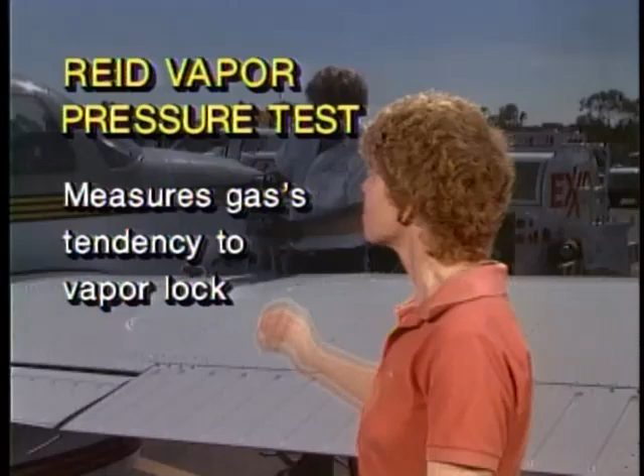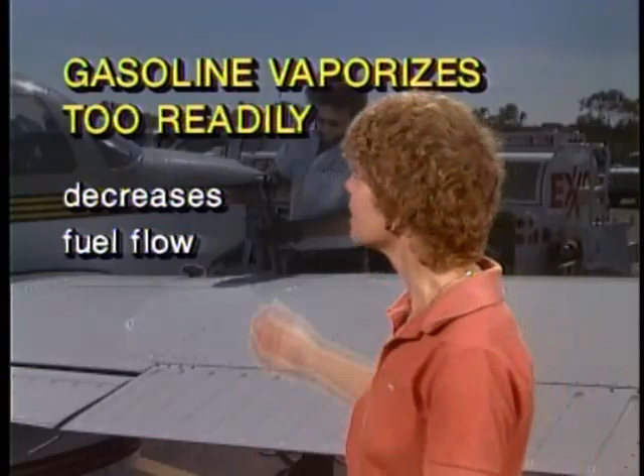The measure of a gasoline's tendency to vapor lock is obtained using the Reid vapor pressure test, which measures a gas's tendency to vapor lock. If aviation gasoline vaporizes too readily, the fuel lines will be filled with vapor, and that decreases fuel flow. It does not increase fuel flow, it decreases fuel flow because you've got vapor in the fuel lines.

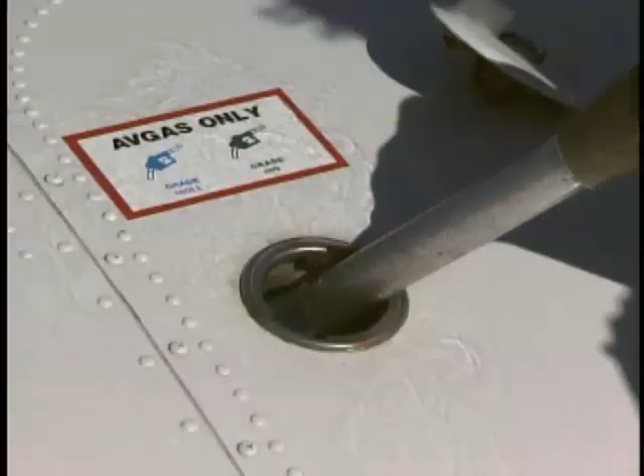The maximum vapor pressure allowable for aircraft fuel is 7 psi, and the allowable vapor pressure of aviation gasoline is lower than that of automotive gasoline. You have to be more careful about the vaporization characteristics of aviation gasoline because it goes up to high altitudes, so the allowable vapor pressure is lower than for automobiles.

Some aviation fuels are aromatic fuels, particularly the high-octane fuels, but a disadvantage of using aromatic aviation fuel is that it deteriorates rubber parts. So you have to keep a much closer watch on those kinds of parts in the aircraft, and in a lot of cases, synthetic rubber parts will have to be used.

One of the things about fuel is that temperature affects the weight of the fuel. Cold fuel is heavier per gallon than warm fuel. And since the aircraft engine is really getting its energy by the weight of the fuel, when you have cold fuel, you're actually going to have more energy available for the aircraft engine as far as the volume is concerned.

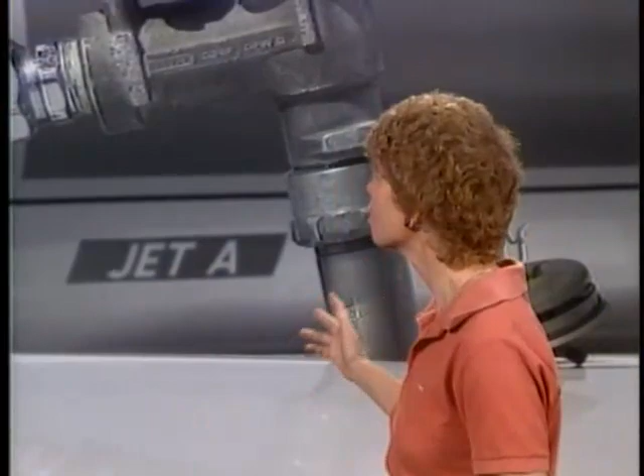As far as jet fuels are concerned, jet fuels are more susceptible to water contamination than aviation gasoline is. The reason is because jet fuel, turbine fuel, is more viscous than gasoline — it's thicker — and therefore it tends to hold that water in suspension.

Using turbine fuels in aircraft has resulted in problems you don't associate with aviation gasolines. One of these problems is microbial contaminants — basically organic material growing in the turbine fuel, produced by various forms of microorganisms. They live and multiply in the water that is suspended in the jet fuel, what the FAA calls the water interfaces of the jet fuels.

If you've got microbial growth in a jet fuel tank and it's not corrected, all those microbes and that growth will interfere with the fuel flow and the fuel quantity indicators. That growth can also cause electrolytic corrosive action in the metal tanks if you don't stop it.

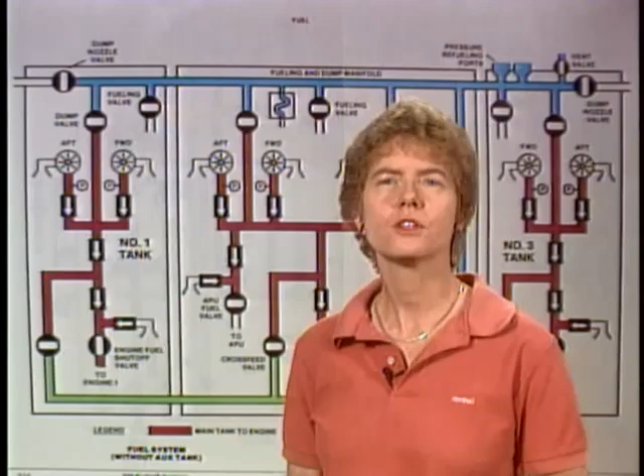Now let's talk about fuel system design. If you've got large aircraft like a 727, you're going to have all kinds of lines running around between the tanks and between the engines, with multiple manifolds in there. The whole purpose of that fuel manifold system is to let you move fuel wherever you want to.

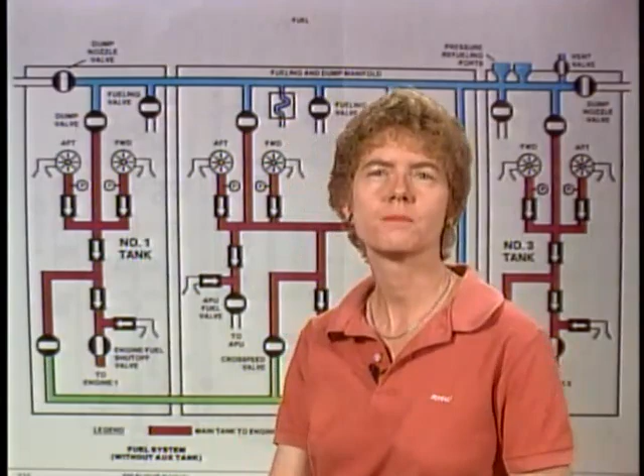What the fuel manifold system allows is, first of all, the tanks can be serviced through a single connection — you can do pressure fueling with all the tanks serviced through one connection. In addition, any engine can be fed from any tank in the airplane, and that gives you redundancy, which has a lot of value in case you've got a problem with any one tank.

All engines can be fed from all the tanks simultaneously — it just depends on how you set up the valves in the system, which gives you lots and lots of options. In addition, a damaged tank can be isolated from the rest of the fuel system.

If for some reason you get a leak in the tank, a lightning strike, or any kind of damage, you can isolate it from the rest of the fuel system, and that's what a fuel manifold system allows you to do.

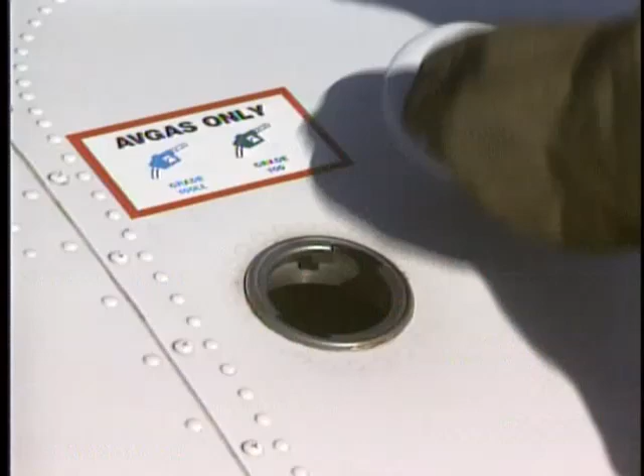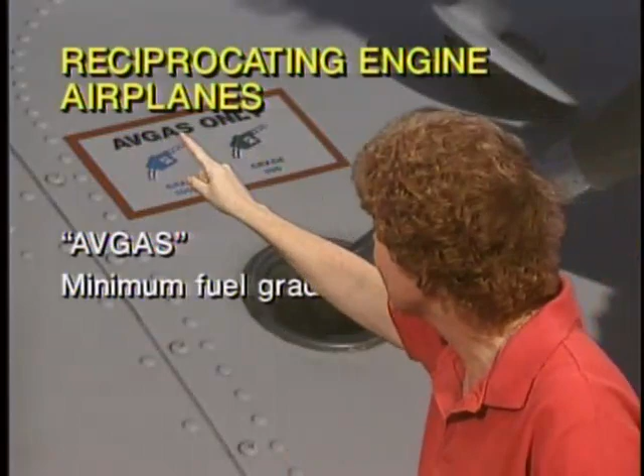When it comes to fueling an airplane, in an effort to avoid people putting the wrong fuel into airplanes and causing accidents, there are minimum required markings that have to be placed on or near the fuel filler cover. For reciprocating engine-powered airplanes, those are the word avgas, so you don't accidentally put jet fuel in it, and also the minimum fuel grade required, for instance 100 octane or 100 low lead.

If it was a turbine-powered airplane instead, instead of avgas it would say jet fuel. The whole idea behind these required markings is to make sure the airplane does not get misfueled.

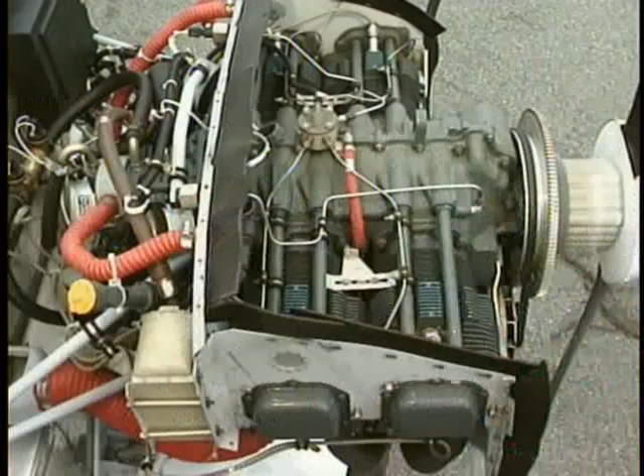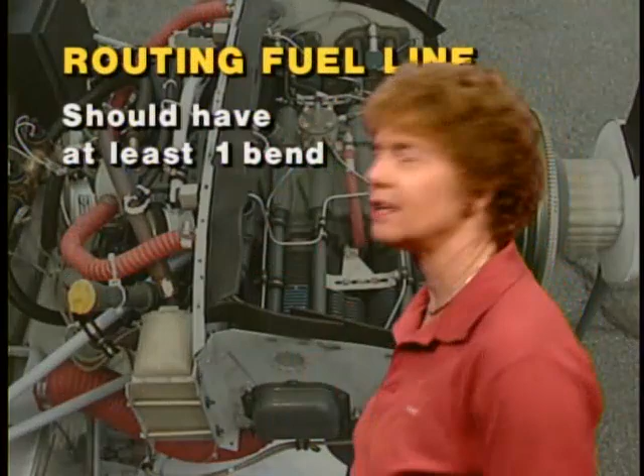Now let's assume you're routing a fuel line like this one here between two rigidly mounted fittings. The way you want to do that is to have at least one bend between the fittings, for strain relief that helps prevent the line from cracking. You do not have to use flexible hose, but you do want to make sure you've got at least one bend in it to help relieve the strain.

Fuel system components must be bonded and grounded, and the idea behind that is to drain off static charges to prevent sparks and thereby prevent fires and possibly explosions.

The main fuel strainer will be located at the lowest point in the fuel system, usually on the bottom of the cowling, one side or another in the engine compartment area. The purpose of it is to trap any small amount of water that may be present in the fuel system. That is the main strainer down at the lowest point in the fuel system.

A lot of aircraft have a gravity feed fuel system that can supply fuel to the engine from more than one tank at a time, like this 172. In that case, the air spaces between the tanks have to be interconnected in order to vent those tanks properly. Let's talk about those fuel tank vents.

One purpose of the fuel tank vent is to limit the pressure differential between the tank and the atmospheric pressure. What the vents are trying to do is maintain atmospheric pressure within the tank, so that the fuel will flow down to the engine properly in that feed system.

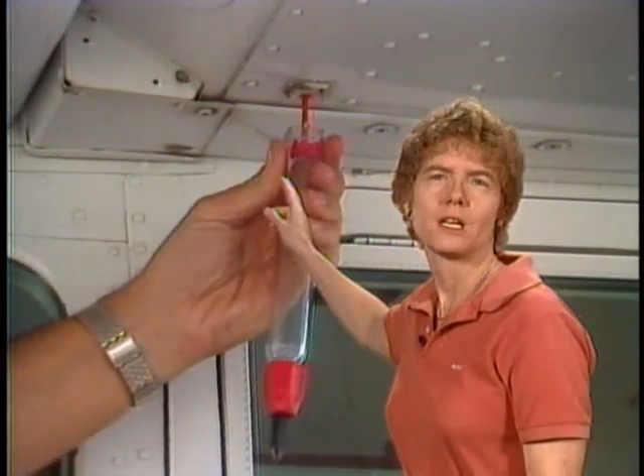On the bottom of the tanks you're going to have a fuel tank sump. The primary purpose of that fuel tank sump is to give a place where water and dirt accumulations, whatever's accumulated in the tank, can be collected and drained out, giving you a chance to check for contamination in the tank.

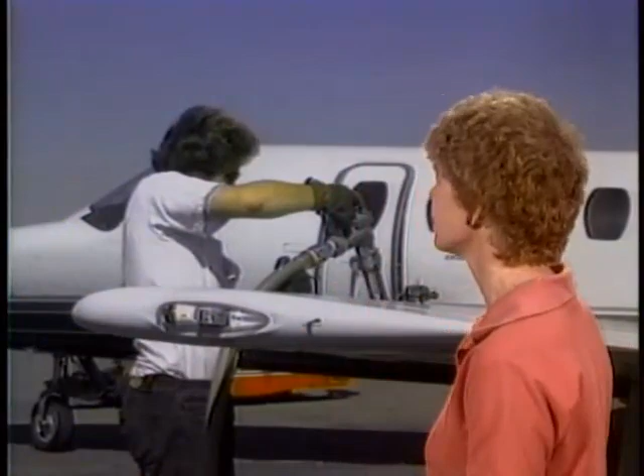There's a number of different ways that fuel tanks can be placed in an aircraft. One way is what's called an integral fuel tank. A Citation, for instance, and a lot of other planes have an integral fuel tank, and a more common name for it is a wet wing.

The integral fuel tanks, or wet wing, are formed by the aircraft structure itself. There's no other tank, no bladder or anything - it's simply formed by the aircraft structure. The reason integral fuel tanks are used in a lot of aircraft, particularly larger aircraft, is to reduce the weight. It gives you a lot less weight if you can use the structure of the wing itself to create the fuel tank.

In the fuel tanks, you're going to have flapper valves used as check valves to keep the fuel from going back away from where you want it to be, for instance around the boost pumps. Flapper type check valves are used in integral fuel tanks to prevent the fuel from flowing away from the boost pumps. As the fuel accumulates around the boost pumps, those flapper type check valves keep the fuel there, preventing it from flowing away.

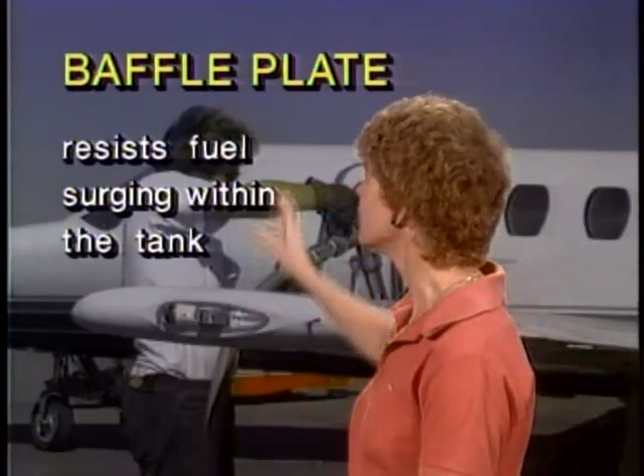Fuel tanks will also have baffle plates in them, and the purpose of a baffle plate in a fuel tank is to resist the fuel surging back and forth within the tank. It slows the fuel down and keeps it from sloshing and surging around.

Some aircraft, for instance the Cessna 182, have bladder type fuel tanks. The bladder type fuel tank is just what its name says - a bladder that goes inside the aircraft wing, and that's what holds the fuel.

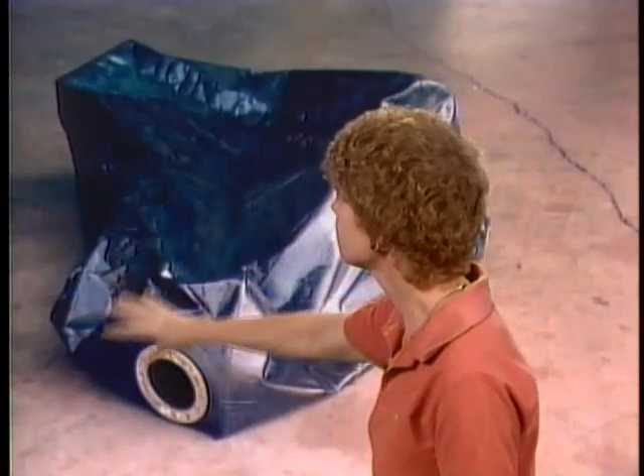If the airplane is going to be left empty for an extended period of time, not flown for a long while, then the inside of that bladder tank needs to be coated with a film of engine oil. The reason for that is to make sure the bladder tank does not deteriorate.

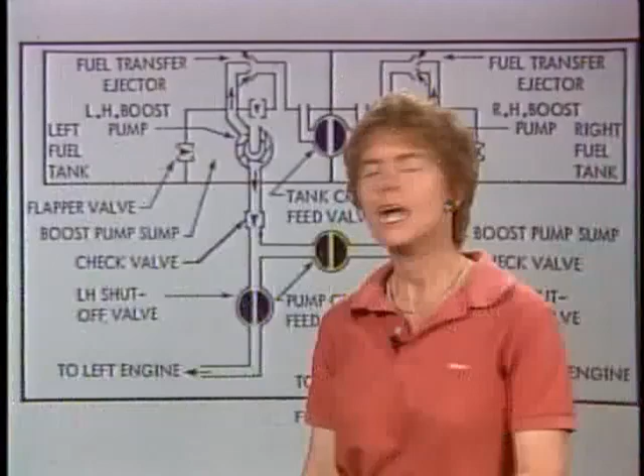If you have a multi-engine aircraft, you're going to have a fuel cross-feed system. Take a look in the FAA's Appendix 2 at Figure 17, which shows the fuel cross-feed system on a twin-engine aircraft. The primary purpose of a cross-feed system is to allow you to feed any engine from any tank, giving you a lot of flexibility.

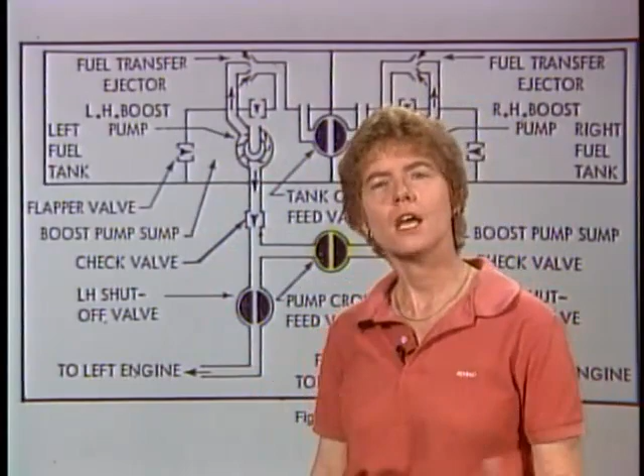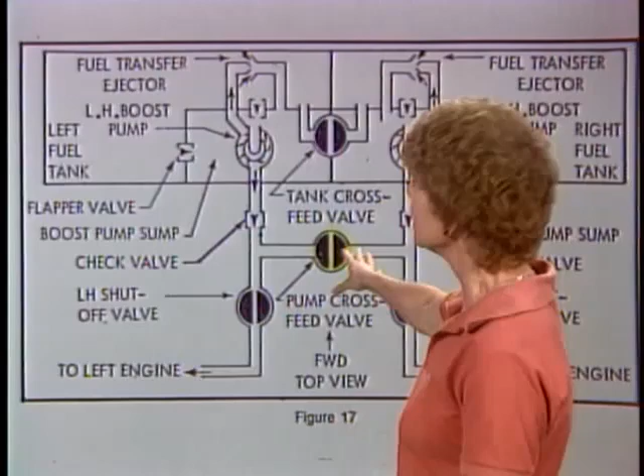There are various valves in this cross-feed system, and they're going to ask you the purpose of the pump cross-feed valve. There is a tank cross-feed valve, and down in the center of Figure 17 there's a pump cross-feed valve. The purpose of the pump cross-feed valve is to allow operation of both engines from one tank. It is not to allow you to pump fuel from one tank to another - that's what the tank cross-feed valve does.

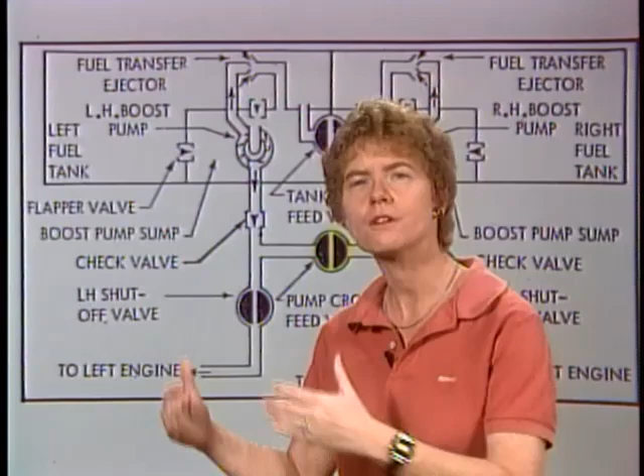Cross-feed systems are used in multi-engine aircraft primarily to maintain a balanced fuel condition. If you've got more fuel in one tank than another, you can feed both engines out of one tank, balance the load, and then go back to feeding each engine off of its normal tank.

Let's talk about fixing fuel tanks. Sometimes you need to repair a fuel tank. If you're going to repair a fuel tank, you need to empty the fuel out first, and you want to avoid conducting any defueling and tank purging operations in any enclosed space - not in an air-conditioned building or any enclosed space. You want to be out in the open air in a well-ventilated area.

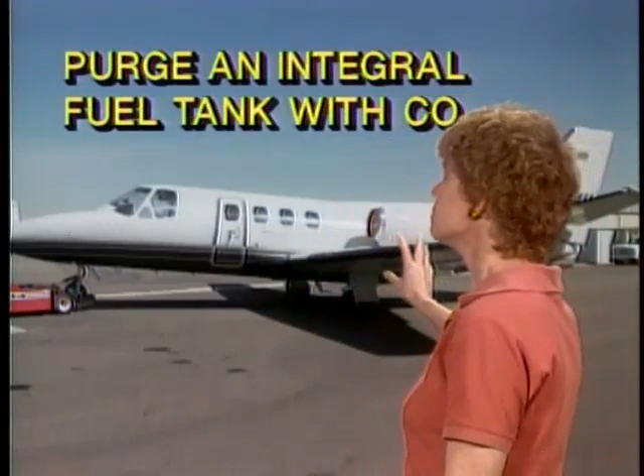An integral fuel tank, one that's basically the wet wing, you should purge with carbon dioxide, CO2, before you try and do any repairs on it. You want to make sure the fuel vapors are out of the tank before you start doing any repairs.

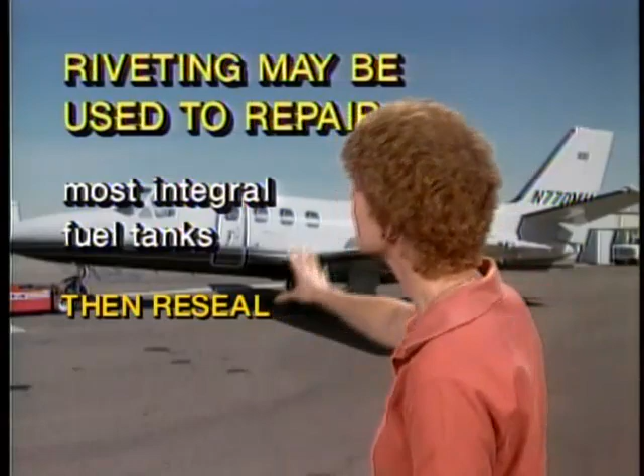When you're repairing integral fuel tanks, riveting can usually be used to repair those tanks because they are part of the basic aircraft structure, so you can use riveting as you would on the aircraft structure to repair those integral fuel tanks.

Some aircraft, such as an older 172, actually have metal tanks in the wings for their fuel tanks - not rubber bladders and not wet wings, but actual metal tanks. If those need work, for instance welding, you want to take the tank out, but before you do any welding, make sure you steam clean it very thoroughly. That way you'll get rid of any fuel or fuel vapors that might cause a fire or explosion problem.

When you're done, if you want to inspect that removable rigid fuel tank for leaks, the best way is to pressurize the tank with air and then brush it with soapy water and look for bubbles. If you see bubbles, it means air is coming through into that soapy water and you've got leaks. It's not practical to submerge the tank in water or fill it with water to look for streams or dribbles. The easiest way is to pressurize it with air and check the soapy water for bubbles indicating leaks.

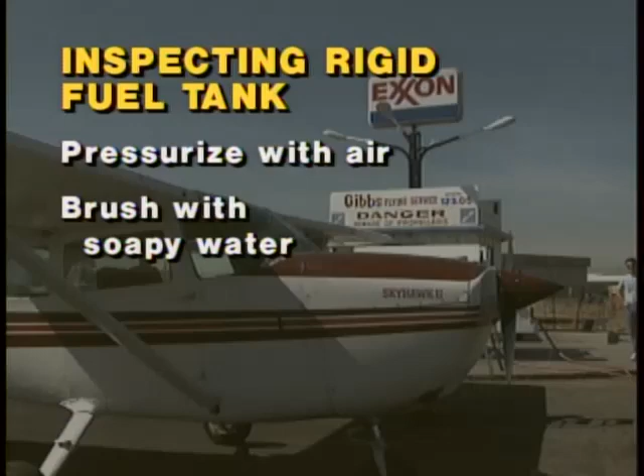Now let's talk about fuel pumps, first of all boost pumps. The fuel boost pumps in an aircraft are operated to provide a positive flow of fuel to the engine. They prevent bubbles in the fuel after it leaves the tank if atmospheric pressure is lower than the fuel vapor pressure, and that fuel pump basically helps make sure the engine keeps running.

Some boost pumps are a centrifugal type boost pump that is buried or sunk in the fuel tank itself. Centrifugal type boost pumps are used in fuel systems, particularly of aircraft operating at high altitude. They supply fuel under pressure to the engine-driven pumps and prevent vapor lock. The centrifugal type pump separates air and vapor from the fuel before it enters the line to the carburetor.

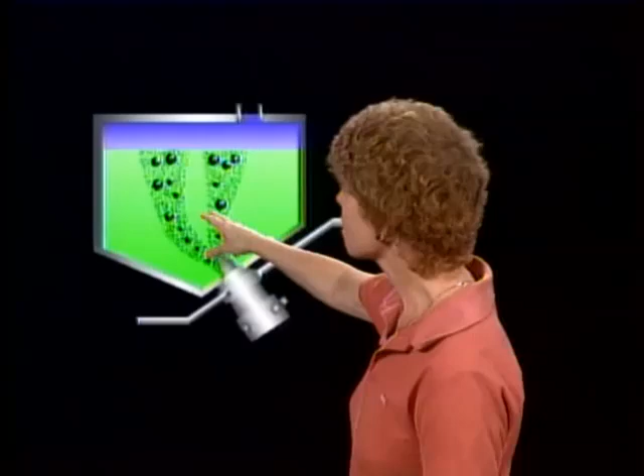How much fuel pressure you've got on the outlet side of a centrifugal type fuel pump is regulated by the pump's design and its own internal clearances. It is not regulated by the speed of the engine, because when you're working with a submerged single-speed centrifugal type fuel pump like this, it's the pump's design and internal clearances that control the outlet fuel pressure.

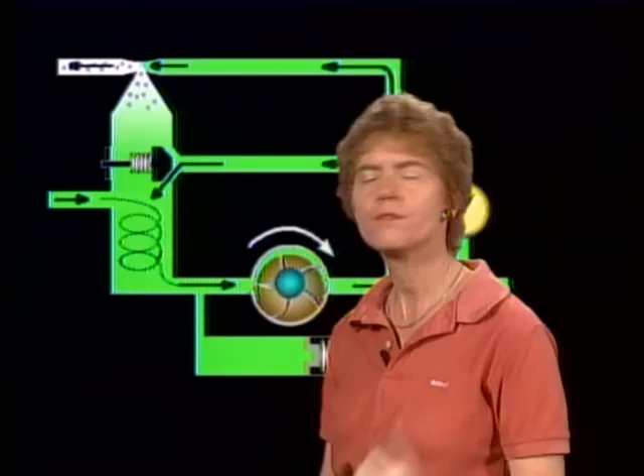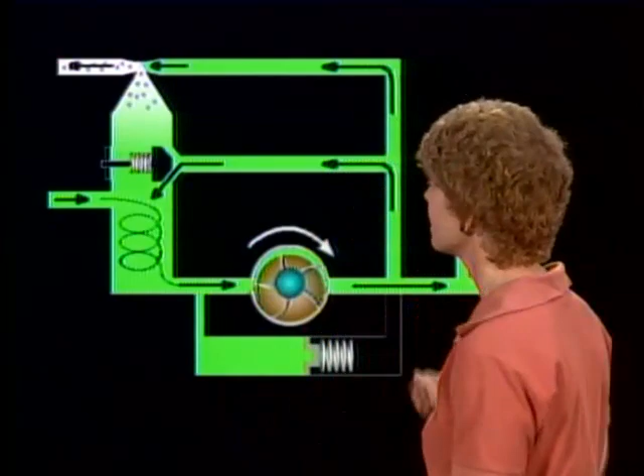A centrifugal type pump like this is not a positive displacement pump. The primary fuel pump on the engine tends to be a positive displacement fuel pump, and a positive displacement fuel pump has to have a fuel pressure relief valve. It's required by FAA regulations because it's always putting out the same amount of fuel through the pump, and the engine isn't always able or ready to accept that much fuel pressure.

So the FAA will ask you on the test: does a centrifugal fuel pump have to have a fuel pressure relief valve? Well, is a centrifugal fuel pump a positive displacement pump? No, it's not, and therefore it does not have to have a fuel pressure relief valve.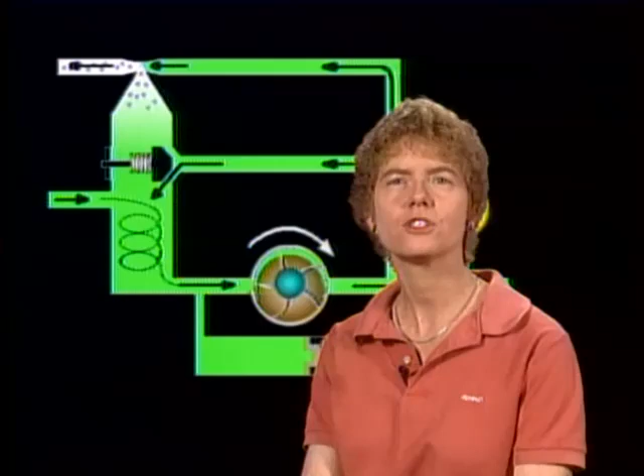On the other hand, they'll ask: do you need a fuel pressure relief valve on a sliding vane type fuel booster pump? A sliding vane pump is a positive displacement pump, and if it's a positive displacement pump, does it have to have a pressure relief valve? Yes, it does. So a pressure relief valve is required in a sliding vane fuel booster pump.

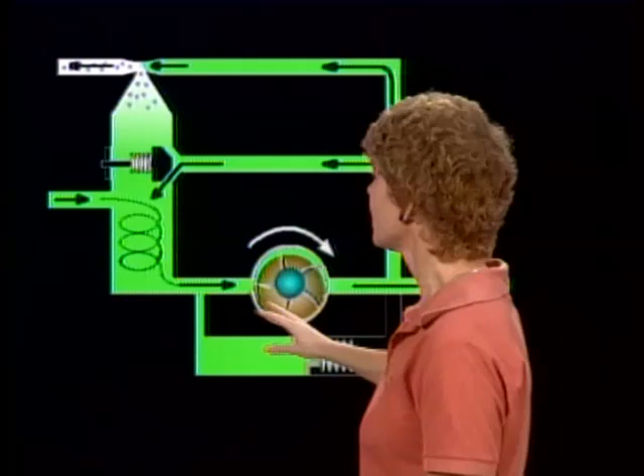Now, a vane type pump like this will also have a diaphragm in it, and the purpose of the diaphragm is to compensate fuel pressures for altitude changes, so that as the aircraft changes altitude, you don't get changes in the fuel pressures.

Let's talk now about our fuel quantity indicators, which figure out how much fuel there is in the aircraft. There are 4 basic types of fuel quantity gauges: electronic types, electrical gauges, mechanical gauges, and sight glasses. Sight glass is pretty obvious - there's just a glass coming up. The old Yankees had it, and a lot of other aircraft, where you can actually see how much fuel there is up through the sight glass.

Mechanical ones, you see for instance in the old Pacers where you've got basically a cork and a little metal wire sticking up out of it, and depending on how much fuel you've got in the tank, the cork and the wire bob up and down. Electronic and electrical we're going to talk about in more detail in just a minute.

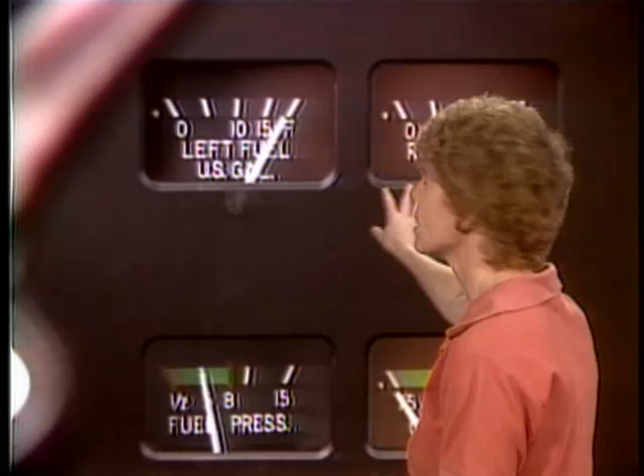As far as the calibration on these fuel quantity gauges are concerned, they have to be calibrated to read 0 in level flight if the quantity of fuel remaining in the tanks is equal to the unusable fuel supply. In other words, when you've used up all your usable fuel, the gauges should read 0. You don't want the gauges reading 5 gallons if that fuel is not usable to the aircraft. So when you get down to the unusable fuel supply, those gauges should read 0, calibrated that way in level flight.

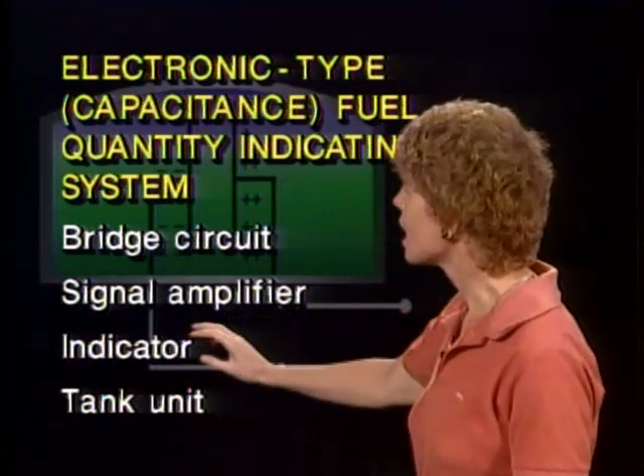Let's talk now about the electronic type, or capacitance type, fuel quantity indicating system. There are 4 basic elements on that capacitance type fuel quantity system: a bridge circuit, a signal amplifier, an indicator in the cockpit, and a transmitter unit - a tank unit that is sending the signal. Let's take a look at this unit and see what we've got there.

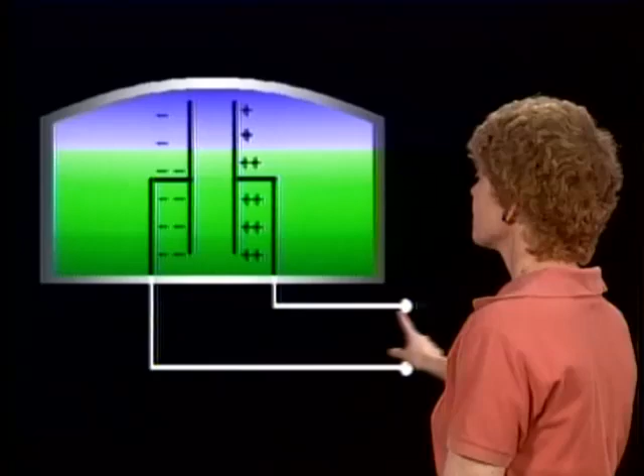In the tank, there are no moving parts as far as a capacitance type or electronic fuel quantity system is concerned. What you've got is a probe, or maybe several probes, installed in the fuel tank. This is the probe here, and here are the electrical wires coming out of it. We have fuel in most of the tank, but then we have air up above it. The probe, or tank transmitter, is basically an electric capacitor, with fuel and air located above the fuel, which act as a dielectric.

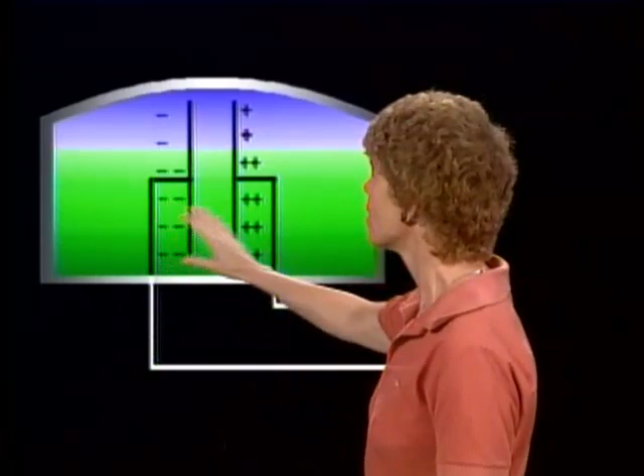A dielectric means a non-conducting material. So basically what you've got is charges trying to move from one side of the electric condenser, which is the probe, to the other. But you have the fuel and the air, which are the dielectric, the non-conducting material, between the 2 parts of the probe or condenser. What happens is that the non-conductivity of the fuel and the air is different.

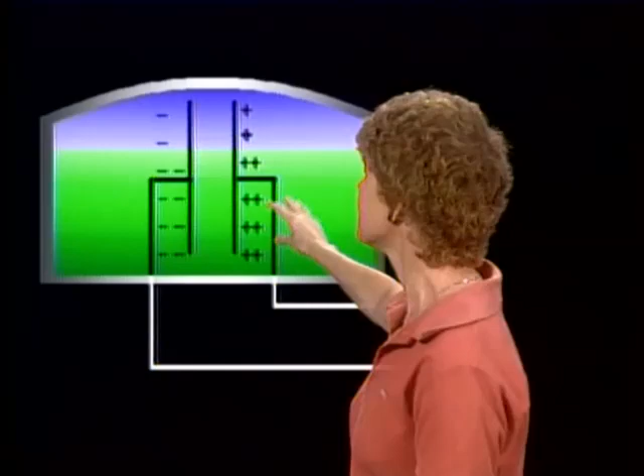So how much electricity can move from one side to the other depends on what the ratio is between the fuel and the air in that tank. The capacitance type gauges tend to be very accurate because they do not have any moving parts in them.

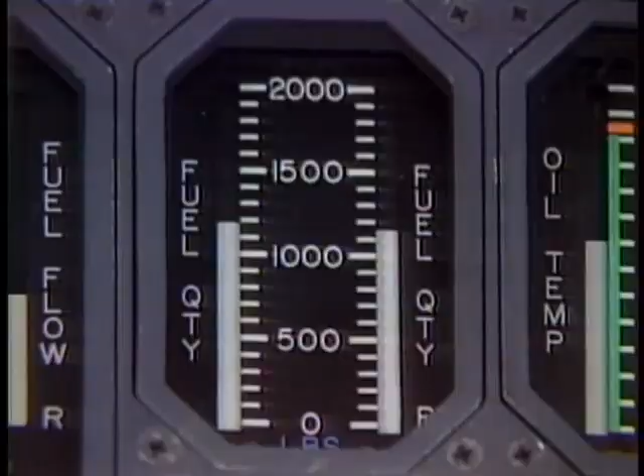They're very accurate in measuring fuel level because they measure by weight, by pounds rather than by gallons. Measuring by pounds instead of gallons is more accurate because the volume of fuel varies with temperature change. You've always got the same number of pounds, but the gallons of fuel will change depending on the temperature of the fuel.

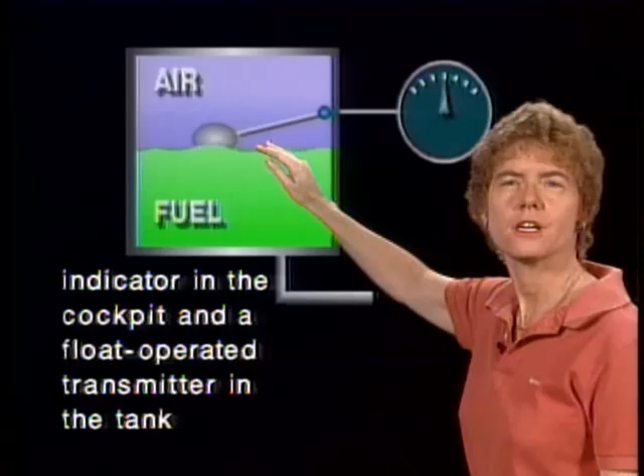Another type of fuel quantity system is the electrical type, which has an indicator in the cockpit and a float-operated transmitter in the tank. The purpose of that float-operated transmitter is to send an electric signal to the fuel quantity indicator. It is not a mechanical connection. It's an electrical signal going from the transmitter in the tank, activated by the float, sending the signal to the indicator in the cockpit.

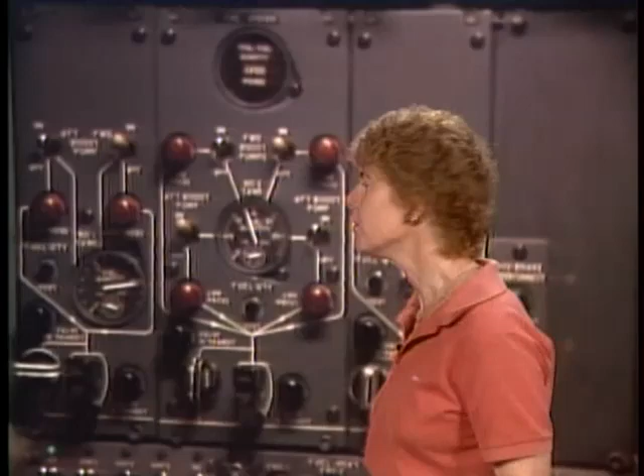Some aircraft have a fuel totalizer. The 727 is one of those, and the fuel totalizer indicates the amount of fuel in all the different fuel tanks—in this case, three different tanks—telling you how much you've got in all the tanks together. That is one definite advantage of electrical or electronic fuel quantity indicating systems.

Several fuel tank levels can be read on one indicator, and the indicator can be located any distance from the tank. You don't have to worry about a mechanical or visual connection, so you can put the indicator any distance from the tank that you want.

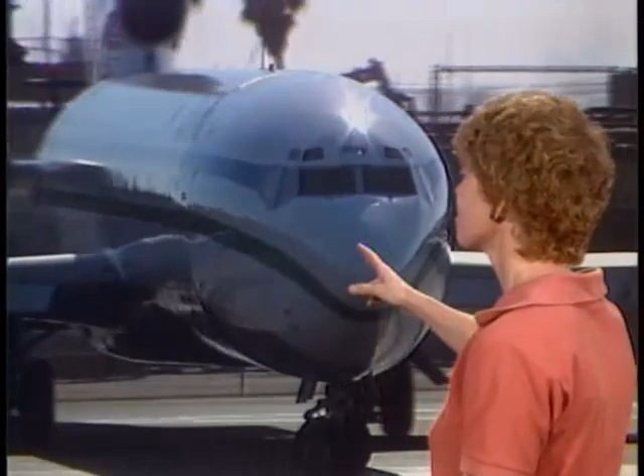On large transport category aircraft, another way to measure the amount of fuel in the tank is to use a drip stick. Unlike what its name sounds, a drip stick is not something you use to check if something's leaking, like fuel or oil. It's basically a visual way of measuring the amount of fuel in the tank using a stick in the wing, filling it with fuel and seeing exactly when it starts dripping out the end.

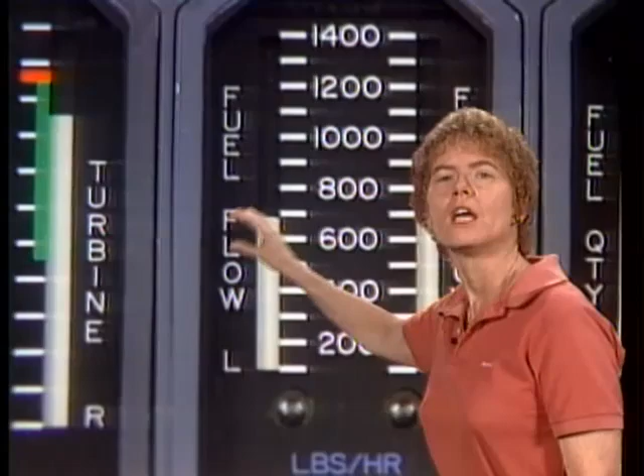Now, how do you tell how much fuel you're using? One way is with fuel flow indicators. Fuel flow transmitters in the fuel lines are designed to transmit data electrically, so you get an indication of how much fuel flow is actually going through the engines.

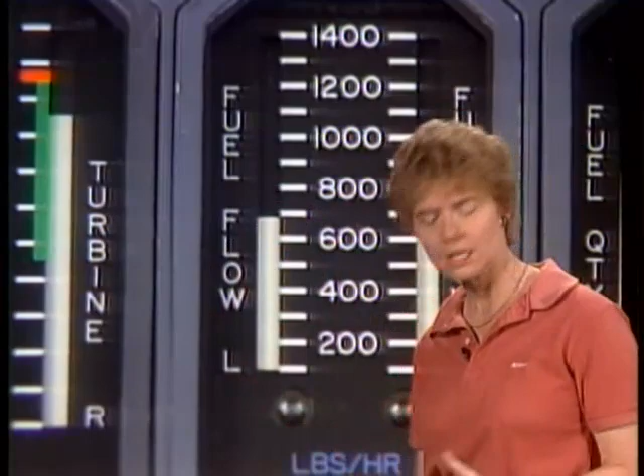Some aircraft, instead of having fuel flow indicators, have fuel pressure indicators. A fuel pressure gauge, like you have in, say, an Archer, is a differential pressure indicator, using fuel pressure and ambient atmosphere to get a differential pressure indication. The fuel pressure gauge indicates the pressure of the fuel as it's entering the carburetor.

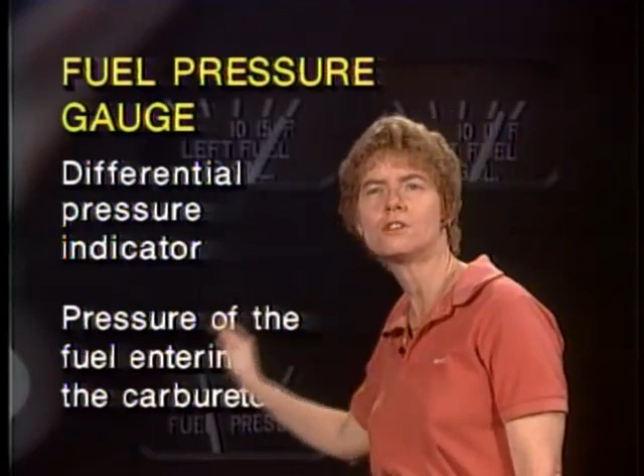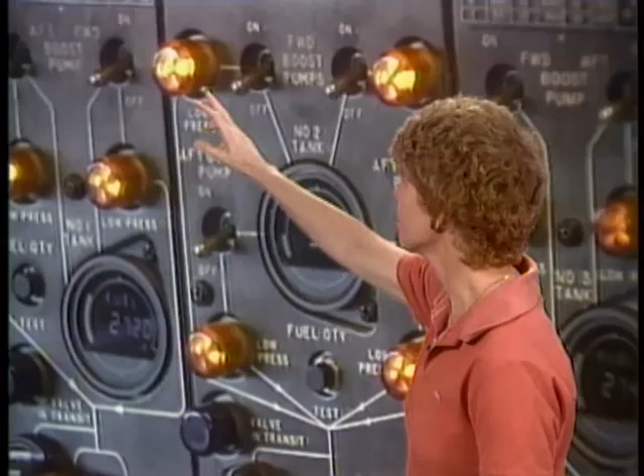Large aircraft, particularly multi-engine aircraft, will very often have a fuel pressure warning system, like these amber lights on the 727. When they illuminate, you've got low fuel pressure. A fuel pressure warning signal system prevents you from allowing the fuel supply in one tank to run out before you switch the selector valve to another tank, because when the pressure gets low, that light illuminates and tells you that you're running out of fuel.

The fuel pressure warning gives you the first positive indication that you need a changeover from one fuel tank to another, because it tells you you're losing fuel pressure due to not having enough fuel coming in the lines. It uses a pressure-sensitive mechanism that actuates the fuel pressure warning system, and that mechanism can be adjusted to change where the fuel pressure warning lights come on, changing the warning limits.

The transmitter in the fuel pressure warning system takes fluid pressure in the lines, however much fuel pressure there is, and converts that to an electrical signal. When the fuel pressure drops below the limits you've set the mechanism for, the fuel pressure warning switch contacts close and the warning light comes on.

Now, if you're dealing with a reciprocating engine aircraft as opposed to a turbine engine aircraft like we have here, the fuel pressure line at the carburetor is where the pressure is taken for the fuel pressure warning signal.

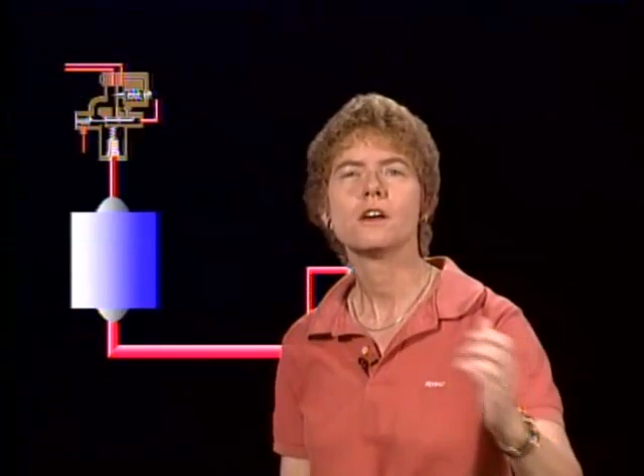Fuel system icing is another problem that gas turbine engines have, and the fuel systems in turbine engines are very susceptible to forming ice in the fuel filters.

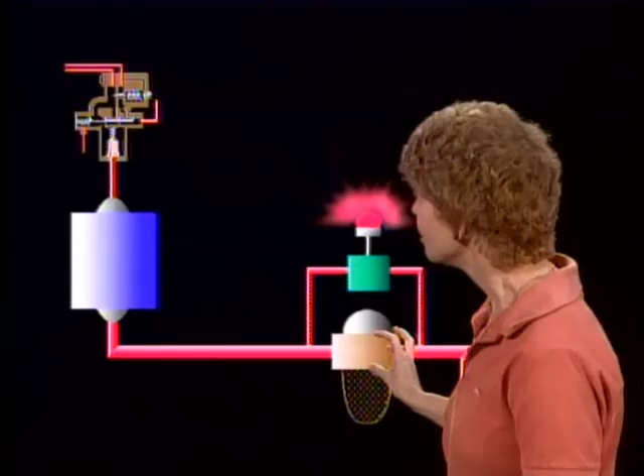You want to prevent the ice from forming in the fuel filters, and a very common way of doing that is to add anti-icing fuel additives. You can heat the fuel, which we'll talk about in a minute, but another way to take care of the problem is to add anti-icing fuel additives.

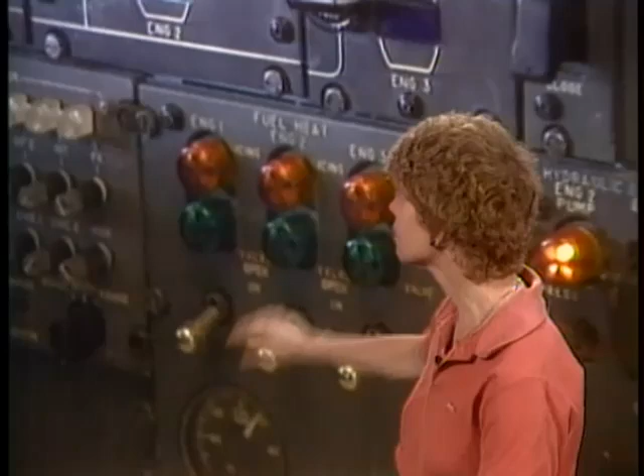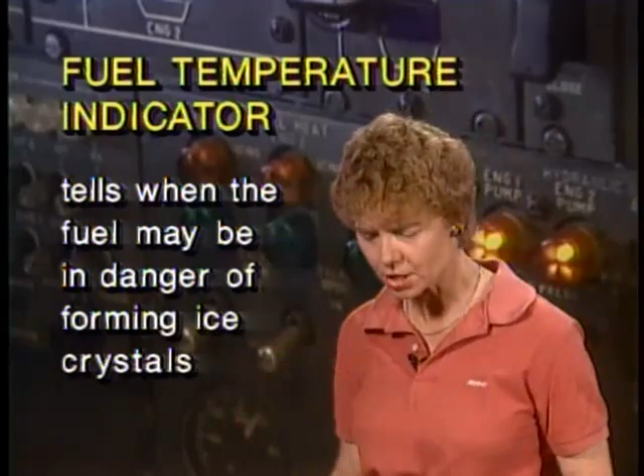Now, on some aircraft, what they do is heat the fuel. For instance, on the 727, you've got a fuel temperature indicator, and a gauge right down here below the fuel heat panel. The fuel temperature indicator tells you when the fuel may be in danger of forming ice crystals because it tells you what the temperature of the fuel in the tanks actually is. Okay, that's nice. You know the temperature of the fuel in the tanks. What do you do about it?

Well, you've got a fuel heat system. What the fuel heater does is it protects the fuel system from ice formation because it operates as a heat exchanger. It takes hot bleed air off the engine and runs it through a heat exchanger past the fuel, which warms up the fuel and prevents the ice from forming.

The aircraft fuel heater can be used, by the way, to thaw ice in the fuel screen. If you actually have already gotten ice in the fuel screen, you can use that fuel heater to go ahead and thaw the ice.

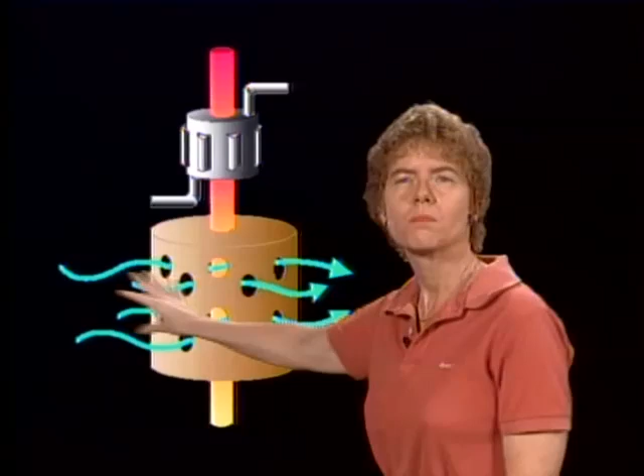Now, one way to heat the fuel is to use engine bleed air. But another way to do it is to use the engine lubricating oil as a source of heat. Some aircraft have one or the other, some aircraft have both. So either engine bleed air or engine lubricating oil can be used as a source of heat for the fuel in order to keep ice crystals from forming in the fuel.

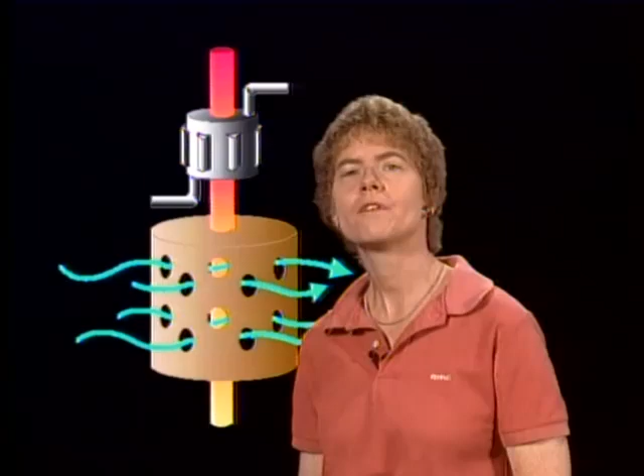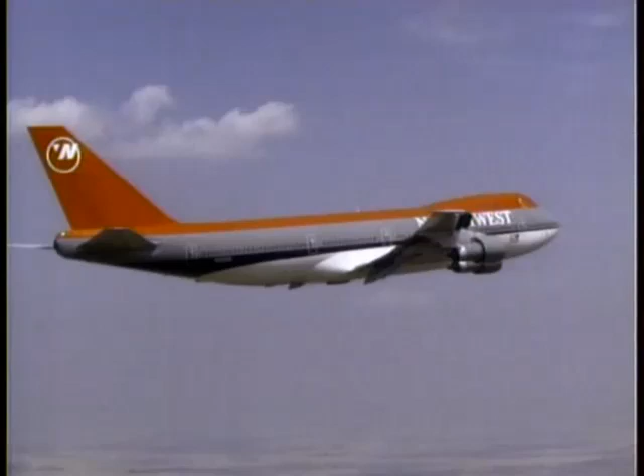Both transport category aircraft, like this airliner, and general aviation aircraft require a fuel jettison system under certain conditions if the maximum takeoff weight exceeds the maximum landing weight.

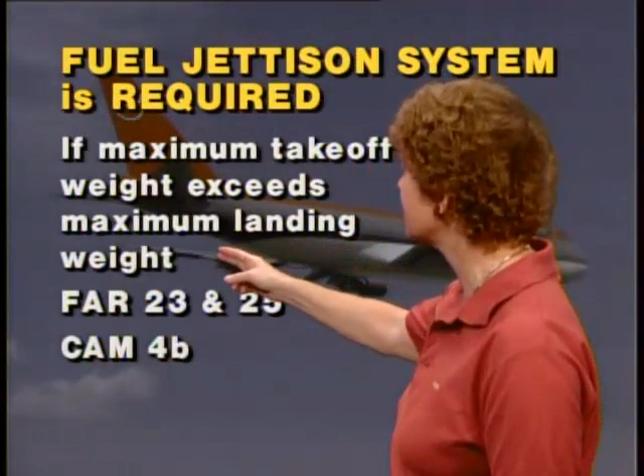Now, interestingly enough, what you really have to remember about this question is the regulation numbers for the regulations that cover the requirements for fuel jettisoning. Those are FAR 23, FAR Part 25, and CAM 4b. FAR 23 covers the airworthiness requirements for most aircraft. FAR 25 covers them for transport category aircraft, and CAM stands for Civil Aeronautics Manual, and that goes back to before the FAA was the FAA.

Now, when you're dumping fuel, you don't want to accidentally dump all of your fuel. So dumping past the limits that the regulations prescribe is prevented by having dump limit valves or by having a low fuel level circuit. The dump limit valves or the low level circuit will shut off the fuel dumping, will stop the fuel jettisoning when the fuel gets down to whatever the limits are that the regulations prescribed for that particular kind of aircraft.

Now, the way the fuel is usually jettisoned, the dumping is usually accomplished, is through a common manifold and outlet in each wing. So the tanks will all be connected together into a common manifold, and then it will dump out through an outlet, but you'll have one in each wing.

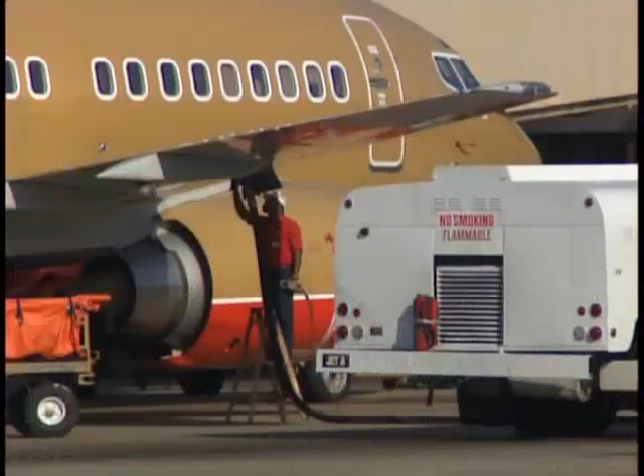Okay, we've gotten rid of fuel in the air, but how about when we're fueling aircraft on the ground? Transport category aircraft typically have a pressure fueling system, which allows the aircraft to be fueled from one point under fairly high pressure, making it a lot quicker and easier.

But they vary with different aircraft manufacturers, so the fueling operator must consult the aircraft manufacturer's instructions for the detailed procedures to be followed. You cannot assume that because you know how to do it on one airplane, you automatically know how to do it on all aircraft.

Pressure fueling is a lot more practical than the over-the-wing fueling used for most general aviation aircraft. There's a single point on the aircraft you hook up to, and you can fuel the entire aircraft from there. For small general aviation aircraft, pressure fueling is much less of an advantage, because of limited fuel tank area.

A 727 has got a lot of fuel tank. You've got to put a lot of fuel in, and it really makes it handy to hook up to one connection and pump it in under high pressure. Small aircraft, it doesn't make that much difference because you don't have that much fuel tank space or volume of fuel going on.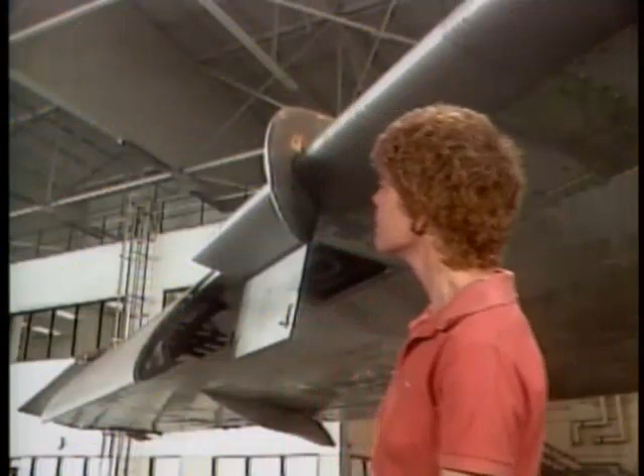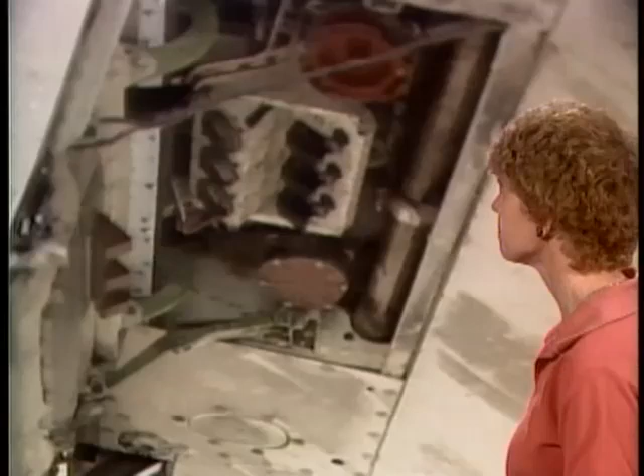Now, how do you do pressure refueling? In the 727, the refueling station is out here on the right wing. This is the panel that comes down to show you the valves and lines and instructions inside. Inside, you've got your hose connections, indicators, and various valves you can turn, with a panel that tells you what the instructions are.

So for a pressure fueling system, you've got a pressure fueling hose and a panel of controls and gauges that allow one person to either fuel or defuel all of the fuel tanks or any single fuel tank on the aircraft. The instructional procedures are normally placarded on the fuel control panel access door, so you know exactly what you're supposed to do.

Before you start pressure fueling an aircraft, one thing you have to do is make sure the pump pressure on the fuel truck is correct for that refueling system. They are different. You have to check what you need and then make sure the pump pressure on the fuel truck matches the fueling system for that particular aircraft.

During fueling operations, you want to make sure that the fuel you're supposed to use is appropriately identified. You want to use the right fuel for the right type of aircraft.

Even if you fuel an aircraft from a truck or storage tank you know is not contaminated with dirt or water, you still have to do periodic checks of the aircraft's fuel tank sumps and system strainers. It could still have contamination from other sources, like water from condensation or particles from the system itself. The fact that the tank or truck is free from dirt or water does not mean you'll never have any of that in the tanks. You still need to drain the sumps and tank strainers.

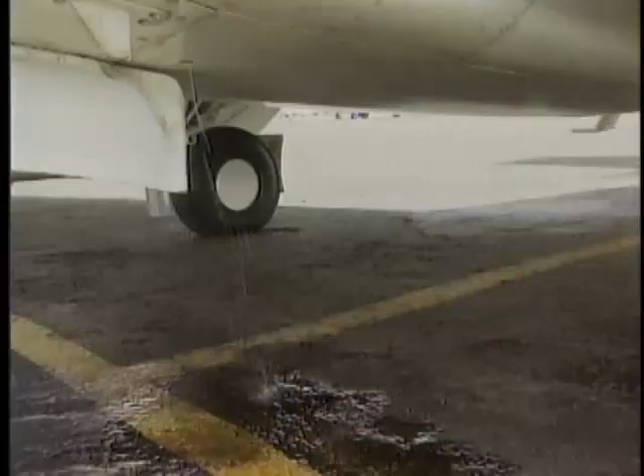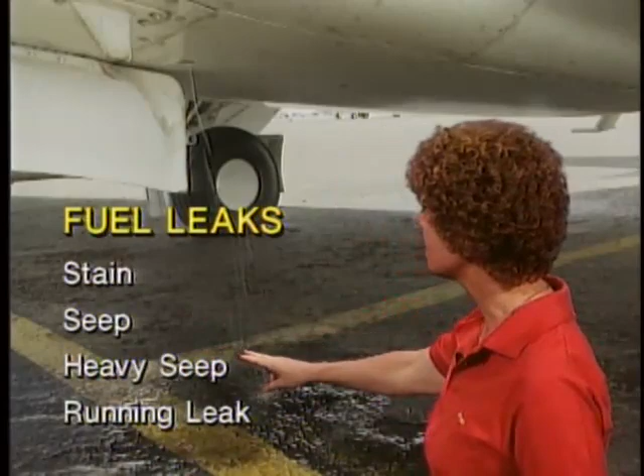Let's talk for a minute about fuel leaks. Fuel leaks are usually classified as either a stain, a seep, a heavy seep, or a running leak. A running leak is the only one where fuel is actually dripping off the aircraft, and it's the only one that will automatically ground the aircraft. If fuel is actually dripping off, it needs to be grounded and have that fuel leak fixed. As for stains, seeps, or heavy seeps, whether or not they ground the aircraft depends on exactly where they're located, whether in a vented or unvented area, and how heavy that leak is. As a general rule, stains, seeps, and heavy seeps, in addition to running leaks, are considered flight hazards if they're located in unvented areas of the aircraft. What you do not want is for fuel vapors to build up in an unvented area. So even if the leak is only a stain, seep, or heavy seep, if it's in an unvented area, it's generally considered a flight hazard.

If you're trying to troubleshoot a fuel leak in a large aircraft fuel system, a schematic of that fuel system would be very important to use. The larger the aircraft, the more important it is to have the schematic available if you're trying to find a fuel leak.

Observing the fuel pressure gauge and operating the selector valves will help you find or locate leaks and defects in the internal portions of the fuel system. When inspecting a fuel system, all the valves located downstream of the boost pumps should be inspected with the boost pumps operating, to see if those valves are leaking fuel with the boost pumps pushing fuel towards them.

If you want to check for internal leakage of a fuel valve without removing it from the aircraft, place the valve in the off position, drain the strainer bowl, turn the boost pump on, and watch to see if fuel flows into the strainer bowl, because if the valve is off, fuel should not be able to move through there even with the boost pump pushing on it.

When installing a fuel line, if you're installing a rigid fuel line of 1/2 inch in diameter, that line needs to be supported at 16-inch intervals. So 1/2 inch fuel line needs to be supported at 16-inch intervals. And that covers what you need to know about the fuel and fuel systems for the airframe course.